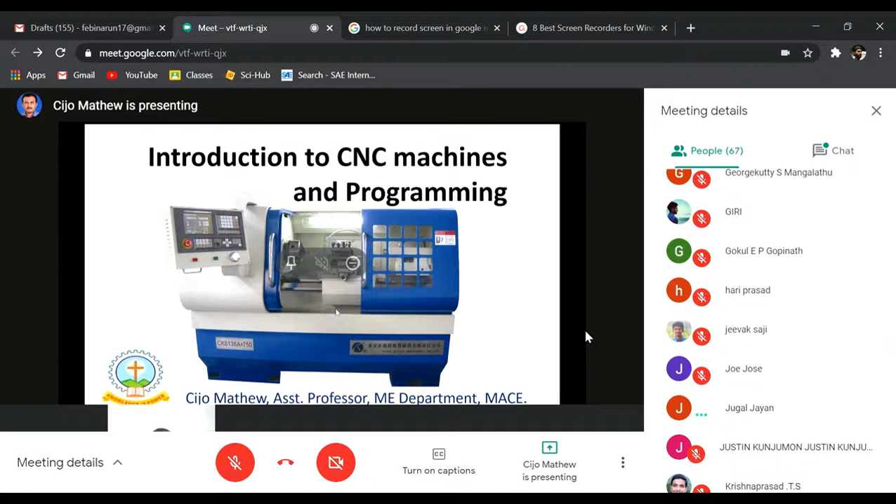So let's go back to BC 300. At that time, metals were not invented. People were using stone or wood as tools. So they had to modify the shape of the wood or stone into some tools. One method they first invented is this turning operation.

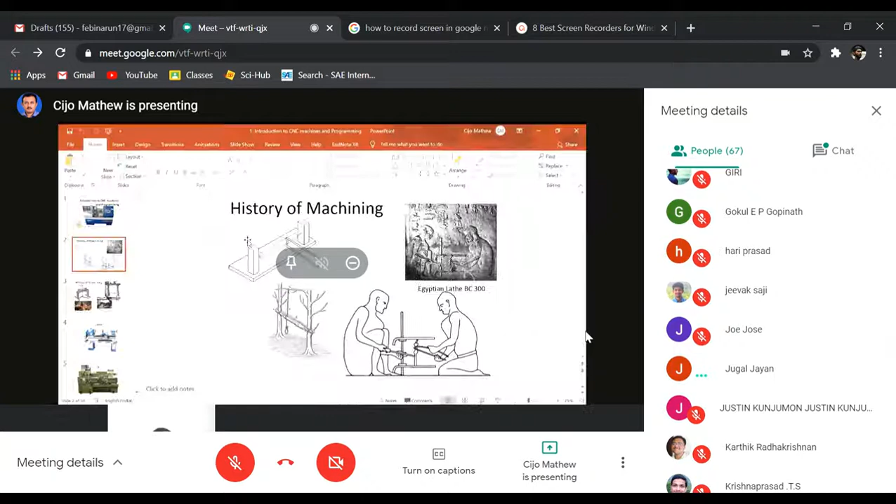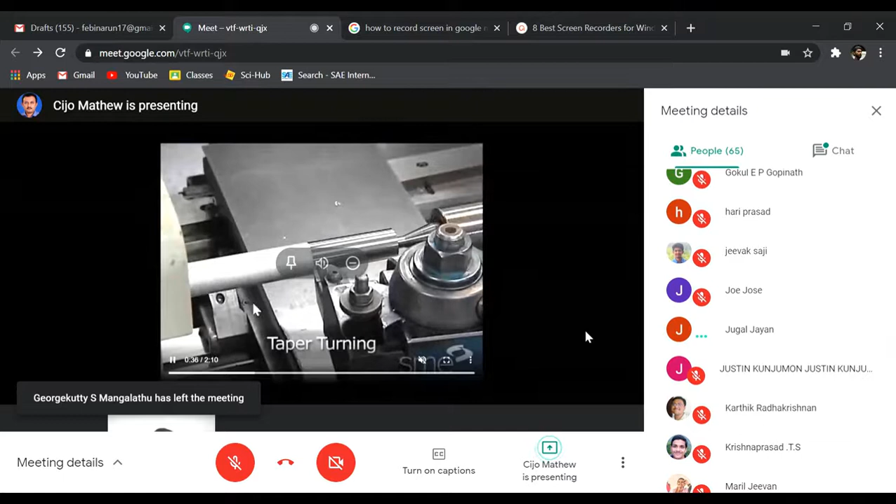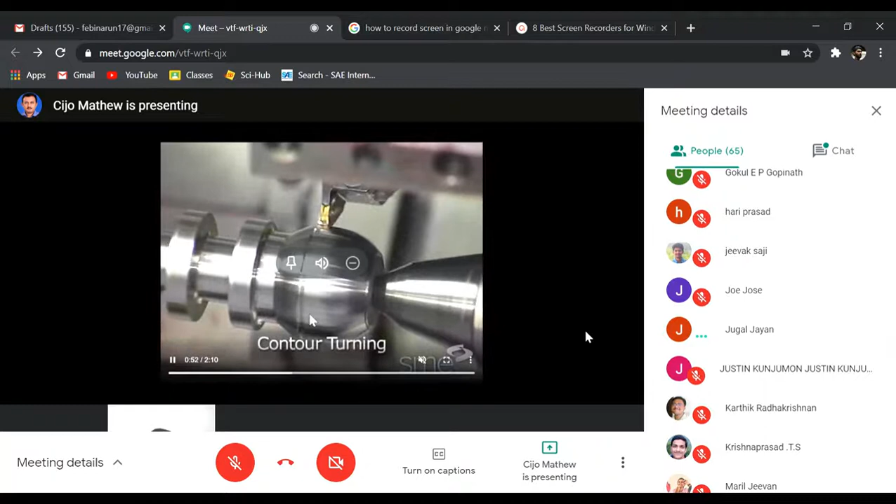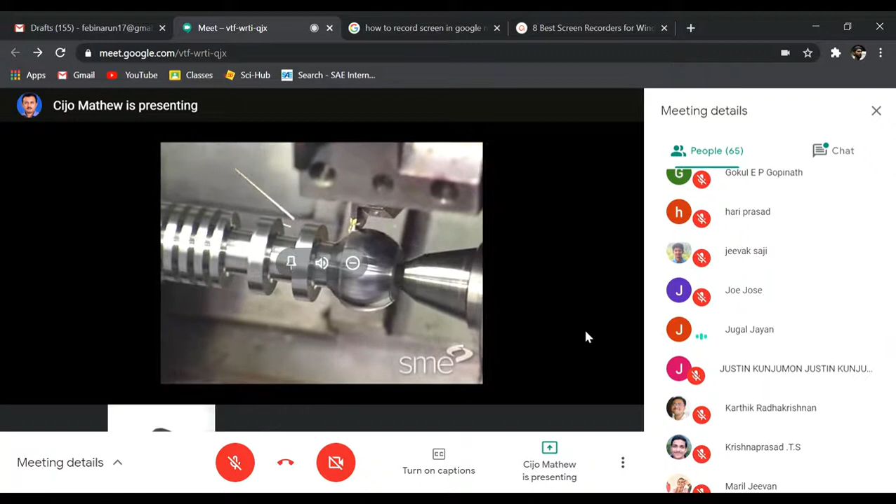So turning operation, you might be familiar, but I'll just show one video to help you recollect the turning operation. This produces a taper. Turning operation is simply, you'll be holding a cylindrical workpiece in between two centers, and this is the tool, and you'll be applying this tool towards the workpiece, and the workpiece is rotating. So this is turning operation, I'm just showing this video to help you recollect what is turning.

Now another very common operation is milling. So let's see milling.

See, this is milling. Hope you can see now. Jugal, can you see it? Yes sir, I can see it.

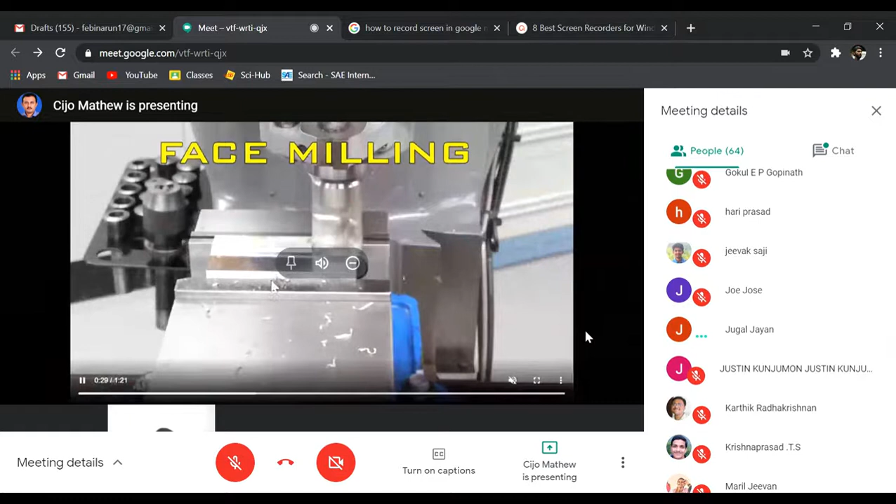So this is milling. In milling, this is actually vertical milling, a vertical milling cutter. That cutter will be rotating, and you will pass the workpiece below that, so it will be machined. This is only one type of milling, there are different types of milling. This is face milling, and there are different types like that.

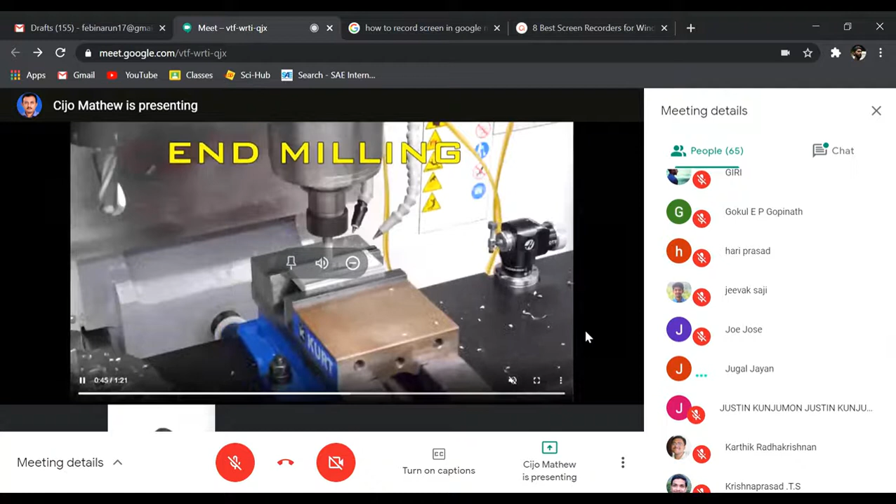So these two are some basic operations: turning, milling. Okay, now we will go to our topic.

And as I told you, turning it... one second. Okay, can you see the screen?

Okay, so turning was actually practiced by people in BC 300. From the ancient pictures, you can see that they started this process. They would hold a workpiece or wood in between two centers, or in between two trees. They would hold this wood...

Then it will be rotated by pulling this string to and fro, forward and backward, and like this another person will hold a tool, as we have seen in the video. The only thing is there is no machine setup, but manually they are doing it. This tool will be another piece of wood or stone, usually harder than the workpiece.

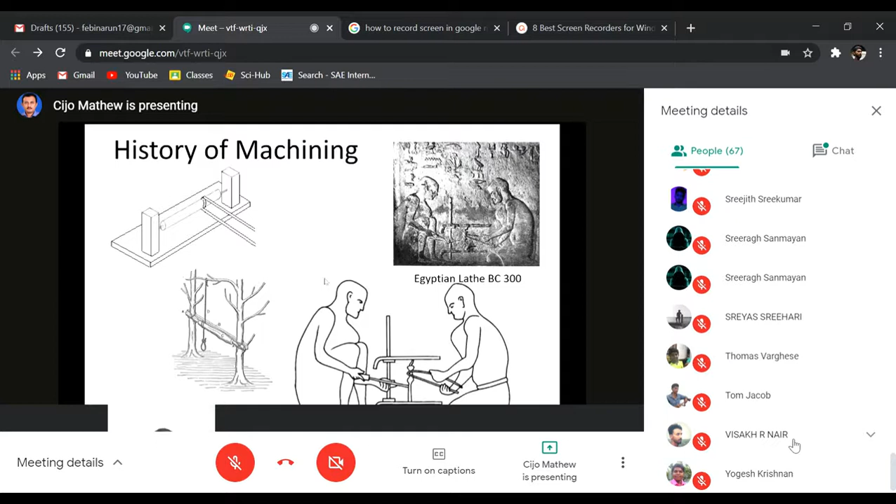So that was the ancient method. If you discuss the history of machining, you can see that now they developed that machine into a setup like this. Instead of holding between two trees, they held the workpiece like this. Then, during the Industrial Revolution and all, they developed a lathe.

So this is one of the ancient or first types of lathe. It's similar to a sewing machine, like the one in your home. They used to rotate the workpiece like this, and the tool is held like this. So this is the history.

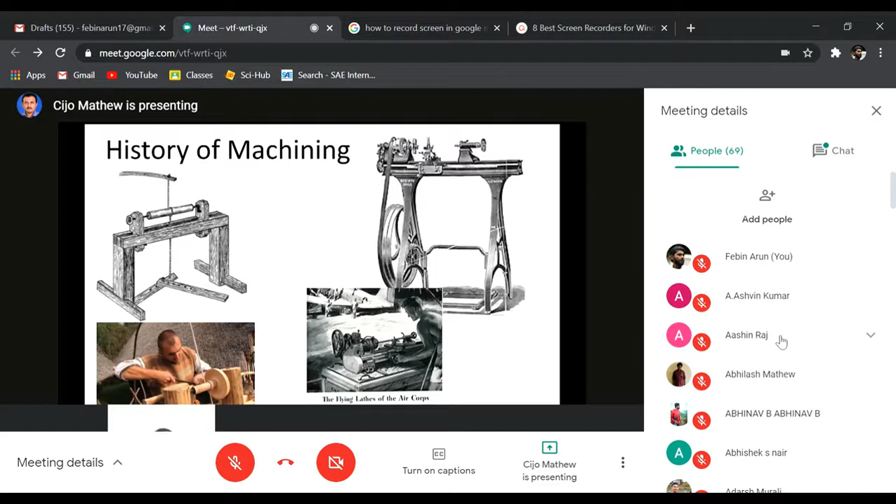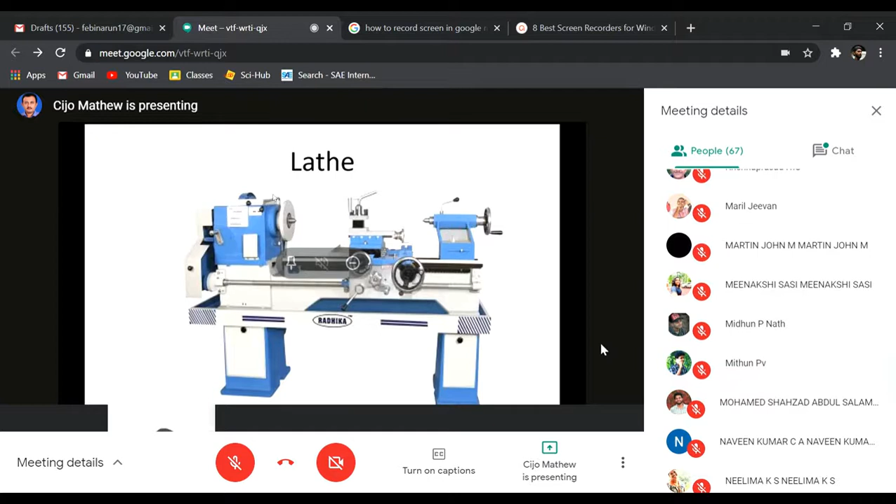Now, after the Industrial Revolution and all, they developed the present lathe. So as you might have seen, this is the conventional lathe used in our lab or some industries, and this is a very basic model of lathe which we use in our lab. Mechanical students may use it during S5 or S6 semesters. And this is an industrial lathe, which has some more facilities.

So whatever it be, the basic operation we are doing in this lathe is turning. This is the same operation we saw earlier in the photos from BC 300 — people used to do the same operation.

So here also you will hold the workpiece in between this chuck and this center. Then in the tool post you will hold the tool, and the parameter that you are changing is... so when you start the machine, this chuck will rotate. There is an engine or motor here, so that motor will rotate this chuck, and that will rotate the workpiece connected to it.

So that will be operating at a constant speed. You can change the speed, but once started it will work at a constant speed. The only thing you are going to change is the two axes of motion — we will move the tool in two directions. That's all we do in a lathe. The same thing people in BC 300 were doing — they were moving the tool in two directions only.

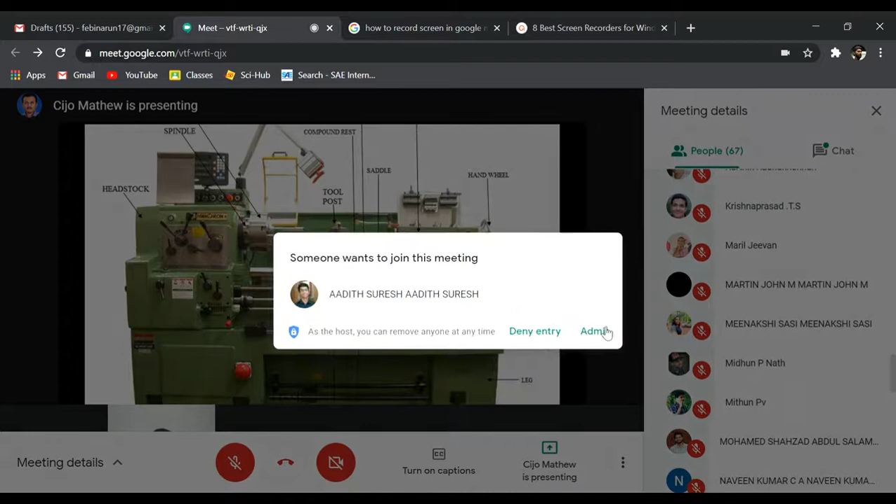That's the only work a man has to do on the lathe. So one is the motion of the tool in the horizontal direction, and another is the motion of the tool in a direction perpendicular to your screen. The horizontal direction motion is the left-to-right motion.

This tool post can be moved left or right by rotating this wheel. You might have studied that. And another motion is feed — that is, you can move the tool to and fro in a direction perpendicular to the screen.

Are you able to understand? So that motion is obtained by rotating this wheel. So manually, the two basic operations you do on a lathe are rotating this wheel and rotating that wheel.

There are other things you have to do — a lot of other things are also there to do — but the basic thing you're doing is what we call a lathe operator, a turner. His designation is known as turner. Usually ITI people or tradesmen are appointed as turners. So the turner will usually be rotating this wheel or that wheel in order to get the specified product.

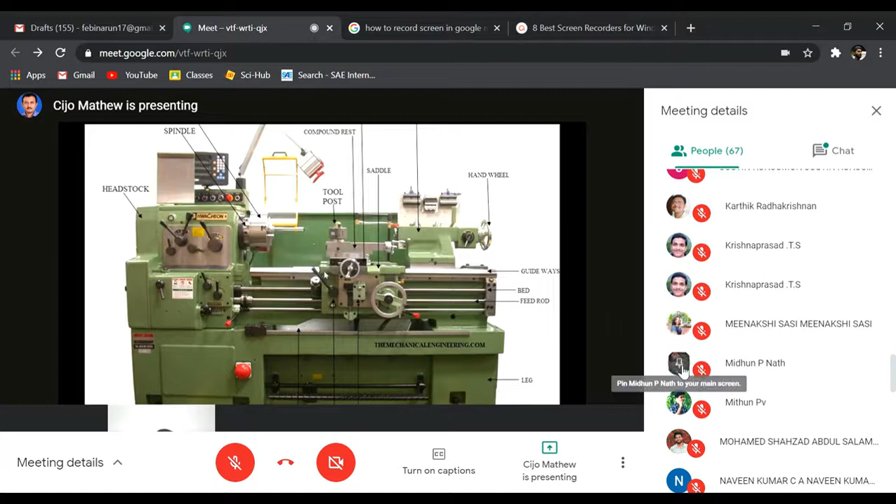Also, along with this World War, other programs like space programs - USSR and America started their space programs. Like that, many advancements in technology started to come. So at that time, the requirement of quality, requirement of mass production, etc. started. So the main problem with normal lathe and normal milling machine is accuracy and repeatability. Repeatability means producing same parts - if you produce 100 parts per day, those 100 parts should look similar.

When you go to the lathe lab, or in the first year you might have gone to smithy or fitting, etc., you are about 60 students. If you measure the products you have made in that workshop, the dimensions will be of 60 varieties.

But in industries or space applications, or wherever high quality is needed, such a thing is not feasible. Every product, let it be 100, 1,000, or a lakh, so maybe 10 lakh, the 10 lakh products should be of almost the same dimension.

You cannot make 100% accurate product. If the dimension is, say, you want to make a rod of 10 millimeter length, it's not possible to make all 10 lakh rods of exactly 10 millimeter. So 100% accuracy is not possible.

But still, you have to make it within a limit, like 10 plus or minus 0.001. In that tolerance we have to make it. So making all products in that range is known as repeatability, which is a main measure of quality.

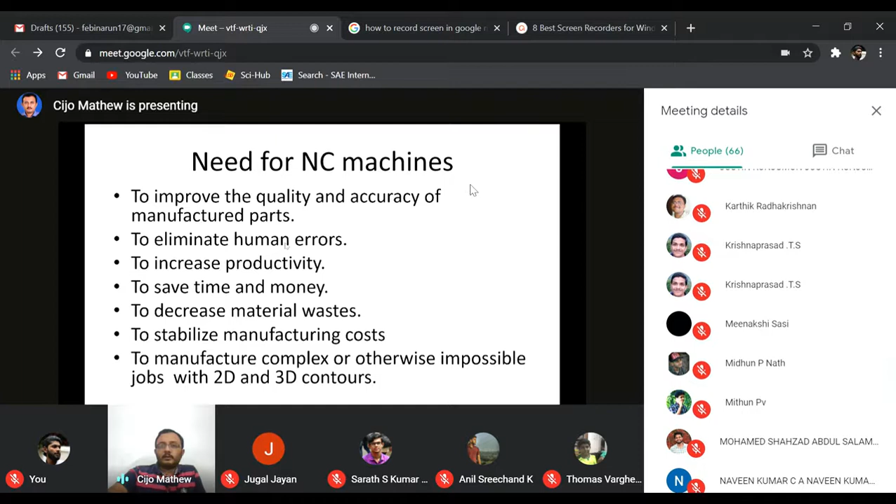Because as you know, in a lathe, the diameter of the workpiece you are making is dependent on the turning of this wheel. How much the tool post moves to and fro depends on the diameter of our product, and that depends on the accuracy by which you are rotating this wheel.

For one rotation of the hand wheel, there are 360 degrees, and for each 360 degrees you can further divide it into minutes, and that further into seconds. So that much accuracy is not possible with human beings.

So what they have developed is numerically controlled machines. Instead of a human being rotating this wheel, let a computer or some motor rotate this machine, controlled by computer. That's the concept they developed.

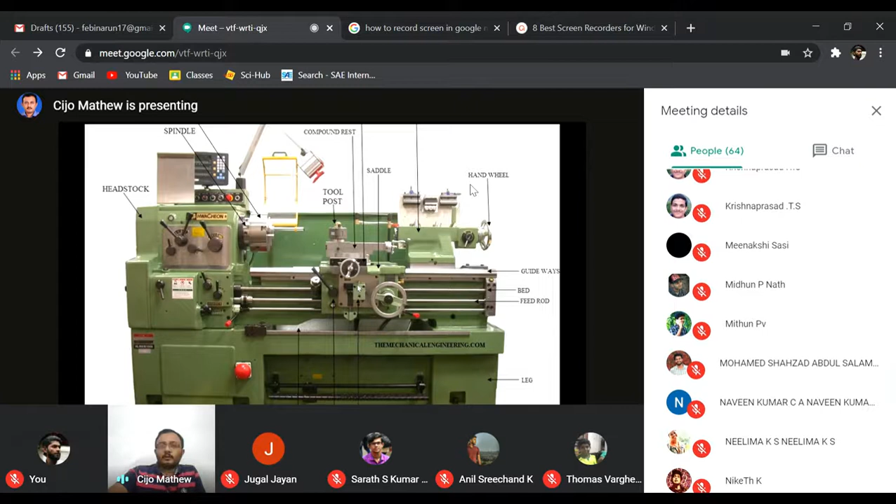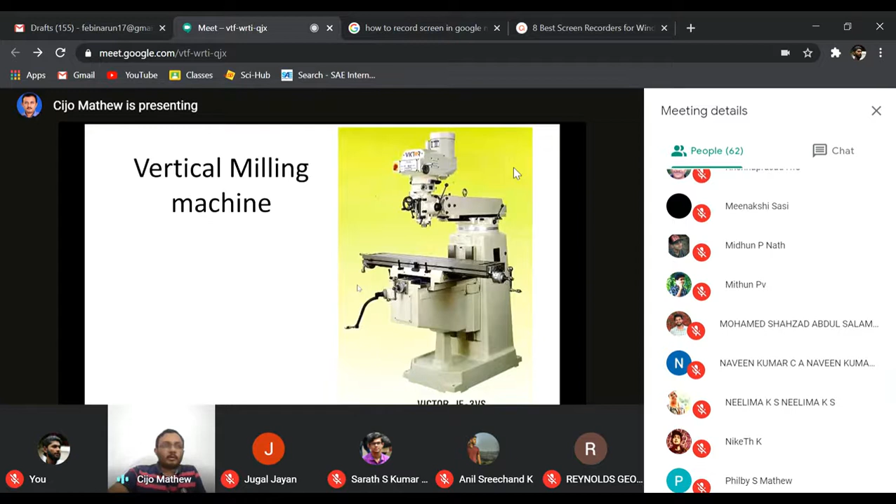Manufacturing cost, that means every time, for example a car, it may vary a little bit, but it should be always constant. If a human being is making that, the human labor may ask for more wage sometimes, so the manufacturing cost will vary, but you have to unify that.

And another reason is for manufacturing complex shapes that may be impossible for a human being. As I told you, if you rotate the hand wheel of the lathe, there are divisions where we need accuracy up to seconds, not only degrees. That is not possible with human beings.

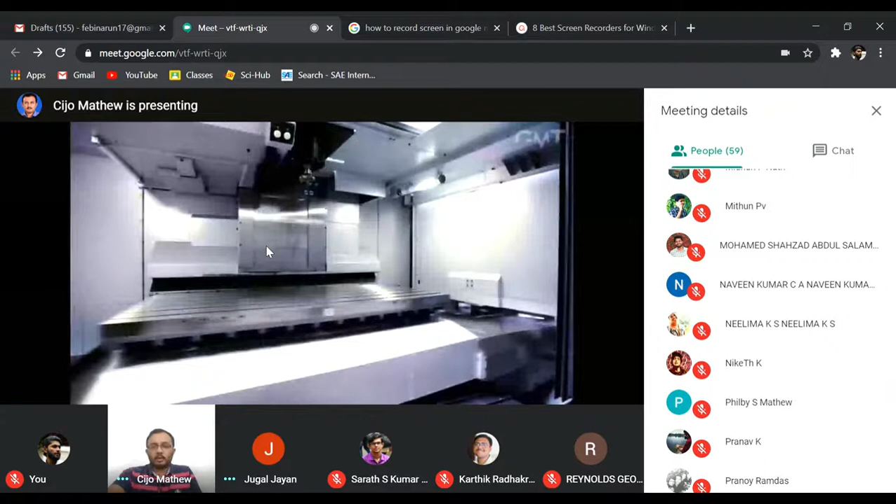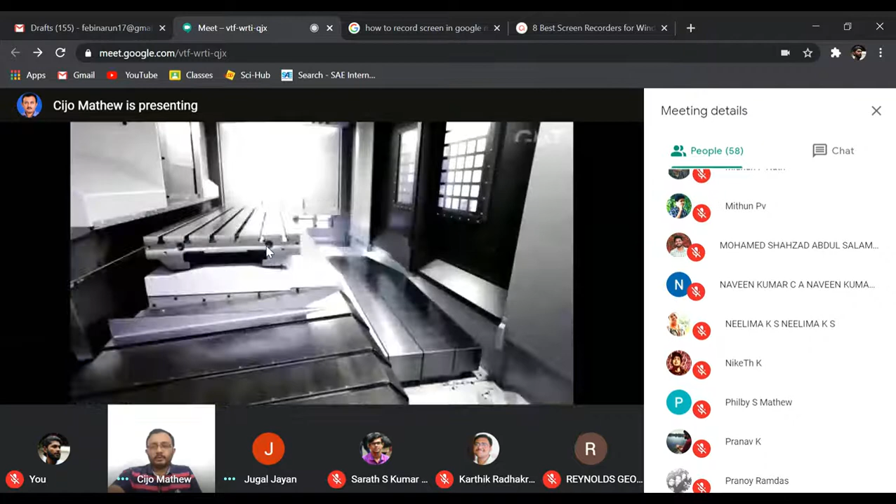Machine structures such as the table, saddle, and milling head slide along a set of rails. Some machines use linear motion guides, which are low in friction through the use of circulating ball or roller bearings. Other machines use cast iron box ways.